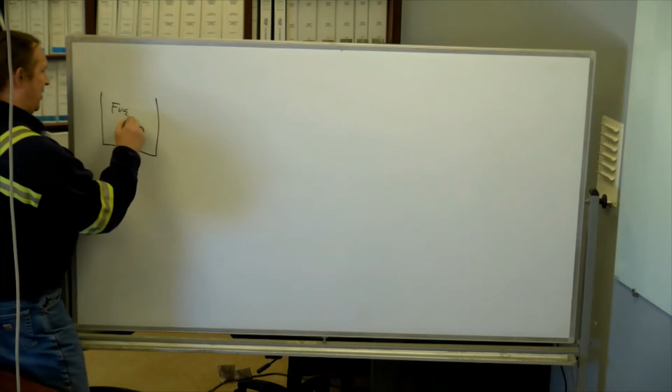So we start at the fuel oil tank. And then that goes over that levee we built to the fuel oil pumps. And these are positive displacement type pumps. Y'all know the difference between centrifugal pumps and positive displacement types? Anybody gonna help me out?

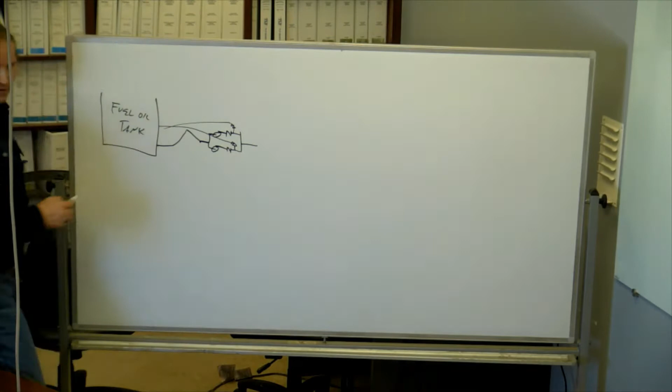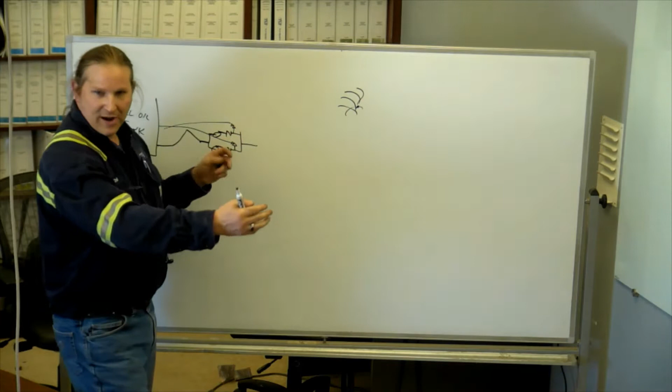No, okay. So in the centrifugal pump, what you've got is a disc that has vanes cut in it. And as the disc spins, the fluid gets slung outwards, and that slinging outwards creates pressure. So in this scenario, if the pump is deadheaded, there's a maximum pressure, and as you open up the valve and give the liquid somewhere to go, that pressure falls off.

A positive displacement pump is going to move a certain amount of fluid for every turn, right? So it's like a screw drive, like an auger, or it's like a piston pump, like a ketchup pump. It fills up the cylinder, and if it fills up 8 ounces, it's going to move 8 ounces of fluid. It doesn't matter what the pressure is.

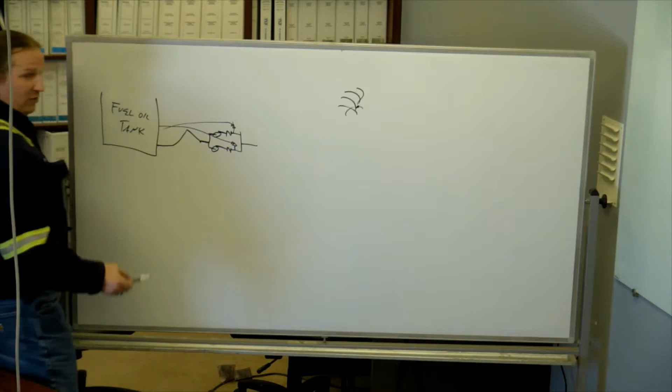Because it doesn't matter what the pressure is, that means if you shut off all the valves, that 8 ounces of fluid is still coming, and it's going to find a crack somewhere. So positive displacement pump systems don't really have recirc valves so much as they have relief valves. All right.

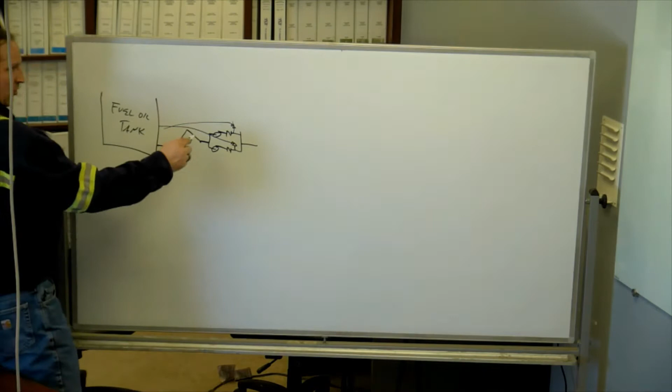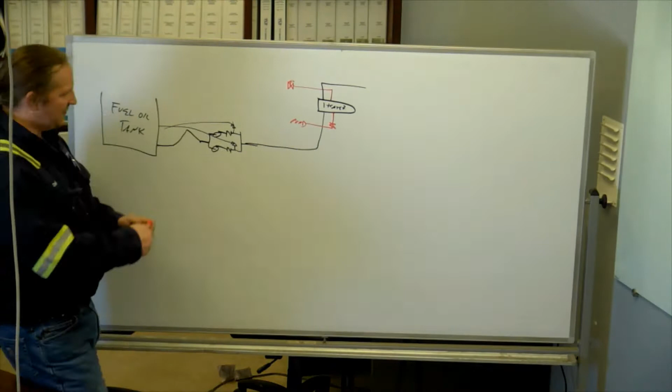So the fuel oil pumps, and then it goes underground across the street, and it goes up to the fuel oil heater on the second floor. Then immediately downstream of the heater, there is a pressure control valve. And this returns back to the tank.

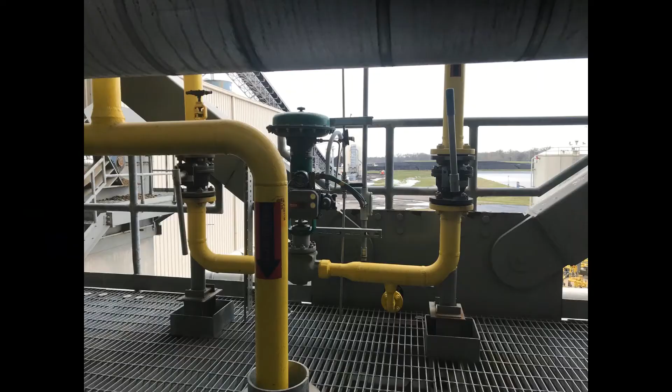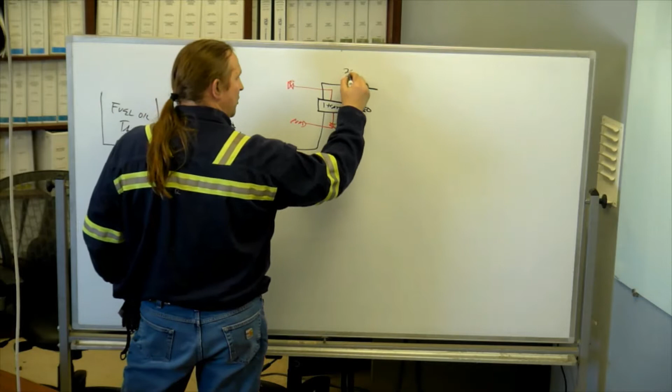This is physically behind the heater. It's between the heater and the rail. And that is maintaining 200 psi on that leg of the header. So as we use more oil and pressure drops, this valve pinches back to drive the pressure back up.

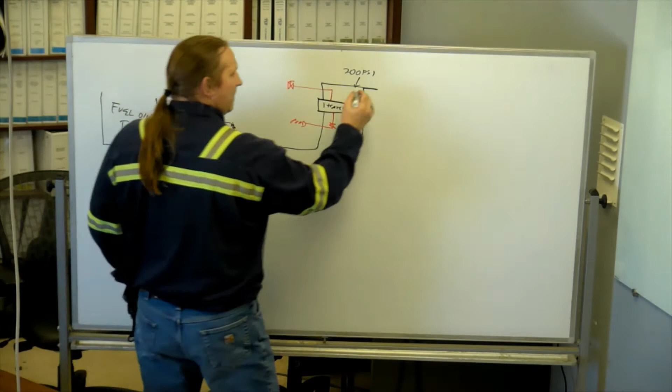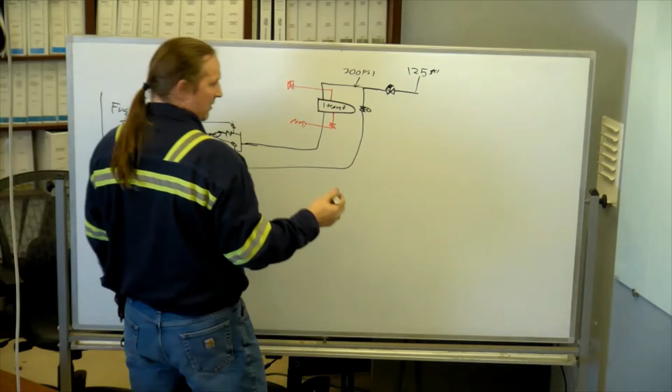And then when you go up a floor, we got another control valve, and this is maintaining 125 psi. And then you've got the trip valve. Then you got your accumulator, and then you got your trip valve.

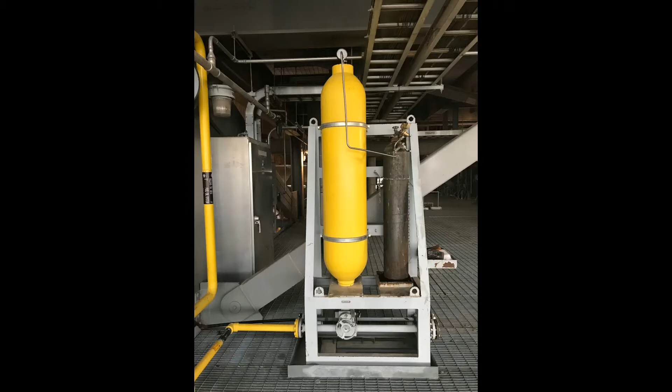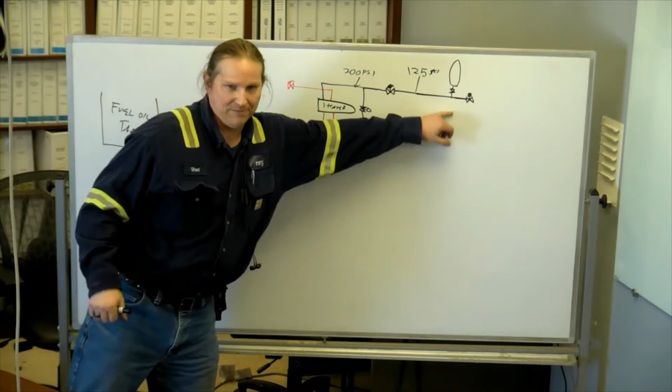Trip valve's in front of the accumulator, is it not? Physically, if you follow the pipe from the accumulator, it ties in upstream. I got busted on this 2 weeks ago, where I didn't know, and I ended up drawing the accumulator on the wrong side of the trip valve.

All right, what's the purpose of the accumulator? To maintain a pressure that you want for the valve. Maintain the pressure. Well, didn't I just say that the valves maintain the pressure? It's maintaining 125. It maintains your surges. All right, it reacts to surges to maintain the pressure.

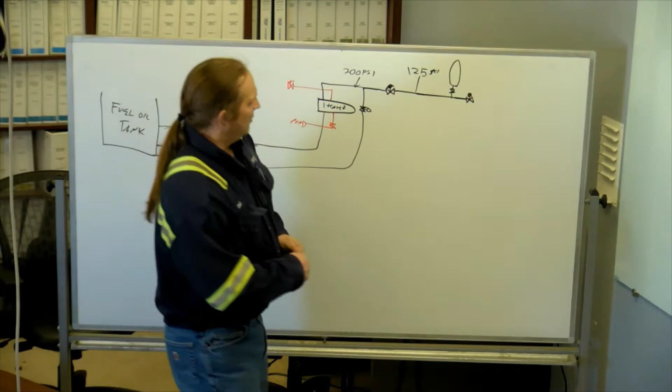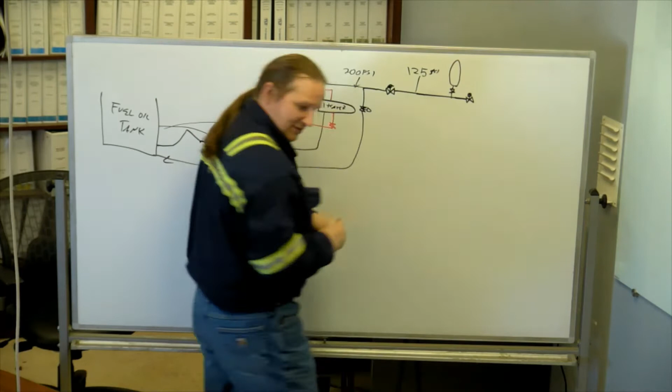So the accumulator has a volume of, what, 50 gallons to it, something like that? Inside that guy, there's a balloon. And that balloon, we line up a nitrogen bottle. Nitrogen should be a different color, shouldn't it? So we fill that balloon up with nitrogen, and we set it to whatever pressure we want. About 90 pounds. 90 pounds is a good answer.

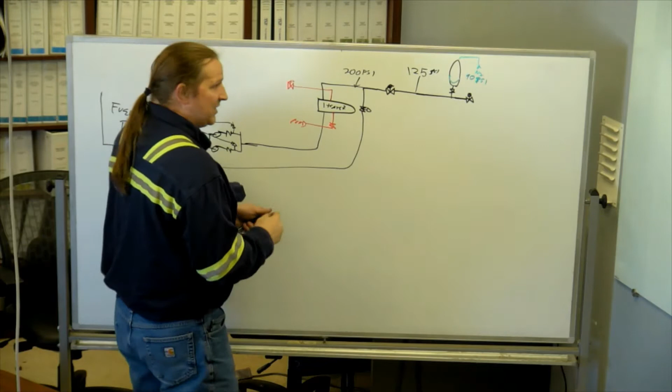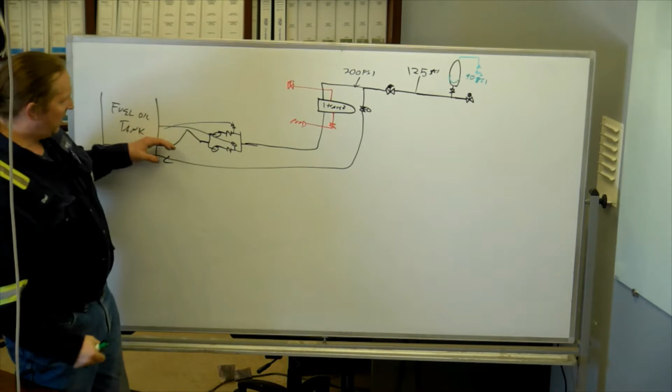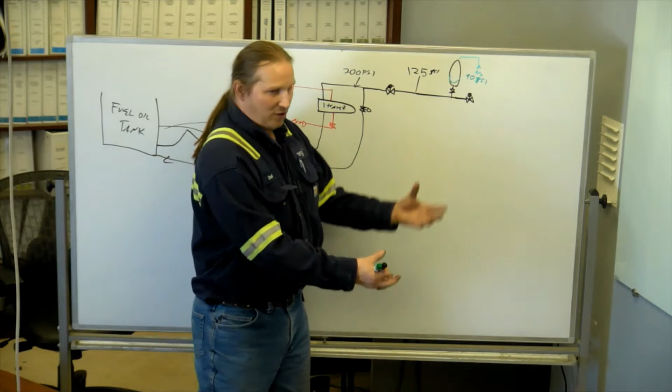You have to set this 90 pounds without any pressure on it. So ideally, you don't have the pump started yet when you get this pressure set. So then you start the pumps. This guy's going to be open all the way. This guy's going to slowly pinch back and drive that pressure up. This guy's going to get your 125, and as that pressure builds up to 125, that balloon is going to compress, and the oil is going to get pushed up into the accumulator.

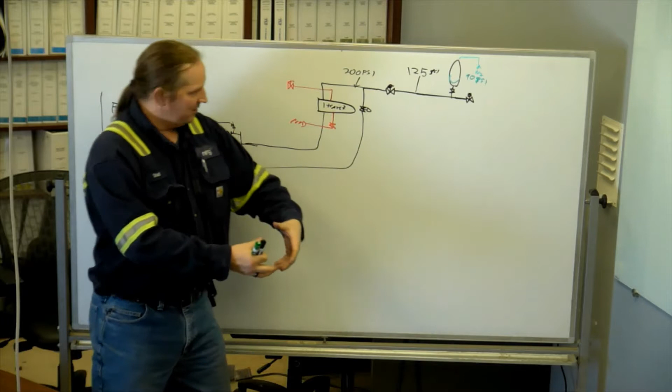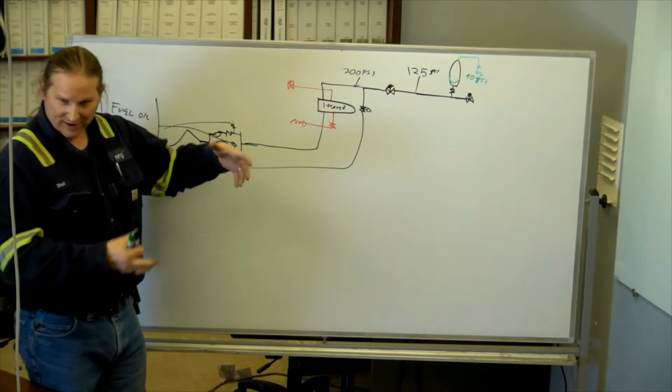So it's kind of like a water tower, where it's got some fluid stored up in it and some pressure. The water towers use height and gravity instead of using a balloon and nitrogen. So it gets shoved up in there, and so that volume of the accumulator is 2/3 oil. So you got 30 gallons of oil in there, and then you got your trip valve, and then we go out to the actual burner rows.

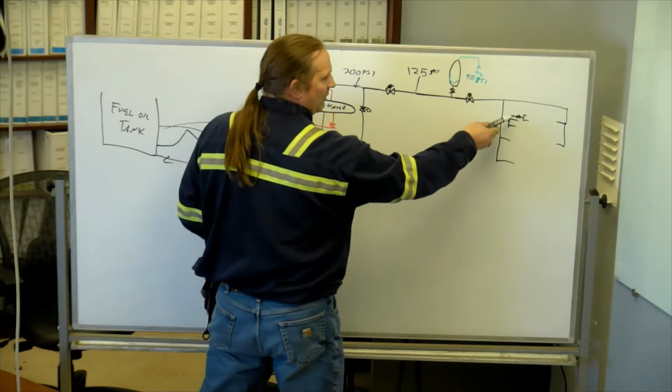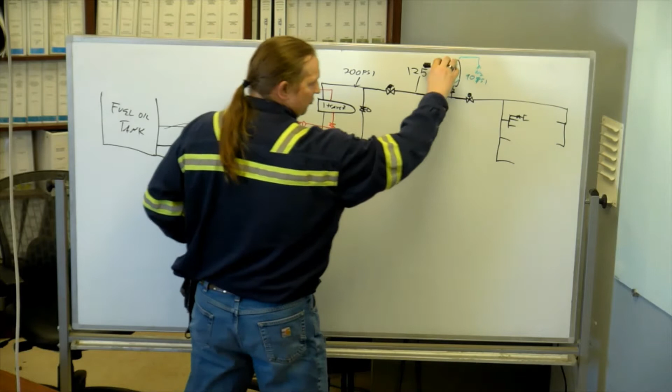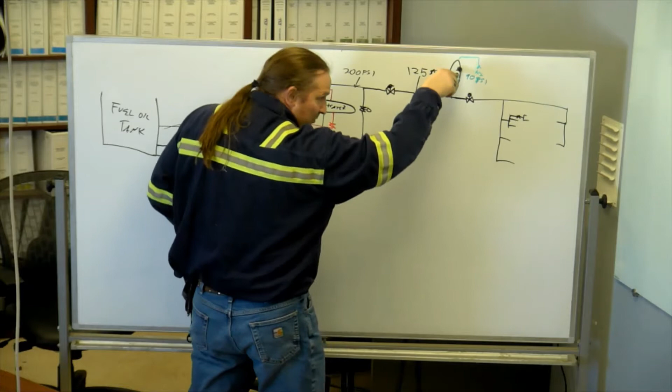So then that makes the pressure drop, and it takes a little while for this control valve to get back open and realize what's going on. But immediately, this nitrogen starts pushing that pressure back out and making up that 30 gallons to give this valve time to react.

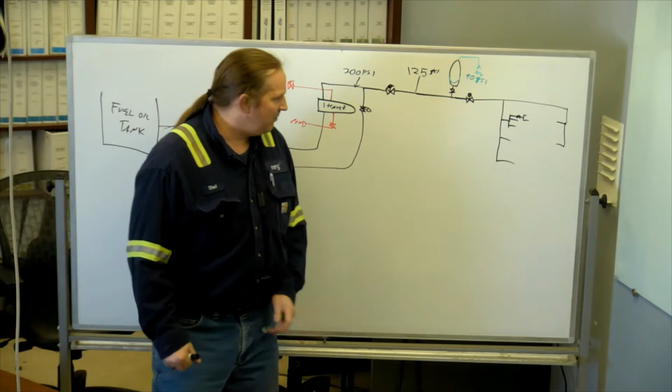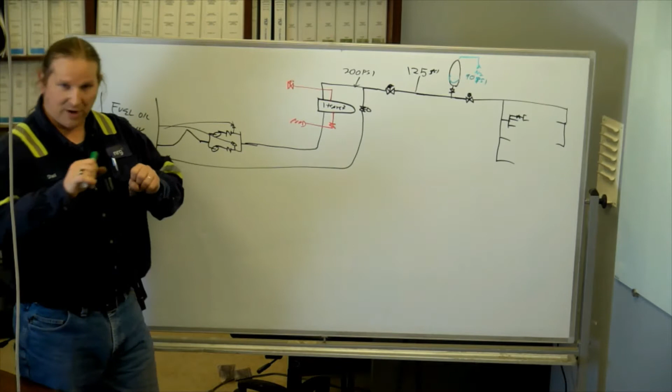If you don't have this accumulator lined up, then when you light off one pair, that pressure dips down, you don't have enough oil flow going to the igniter, and one of your igniters blows out. And so you end up putting one on and losing one, putting one on and losing one, and just chase them.

If you line this up with too much pressure, it is just as bad as not lining it up at all. If you have no pressure, then you end up with a solid slug of oil and nothing to push it out. If you have 130 pounds of nitrogen in there, then that balloon doesn't compress at all. You might as well just be pushing against a flange.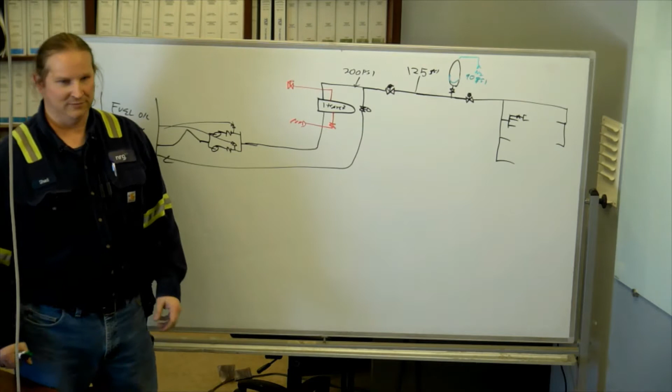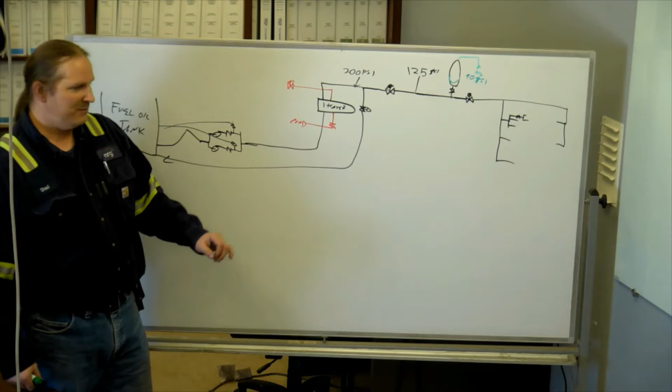There have been times that the balloon in the accumulator got leaks in it and got all filled up with oil on the inside. And the real answer there is to shut things down, drain it, and have maintenance replace the bladder. I think a lot of that was self-inflicted because operators were not lining up the balloon before the pressure started, and the balloon was getting all wadded up in there.

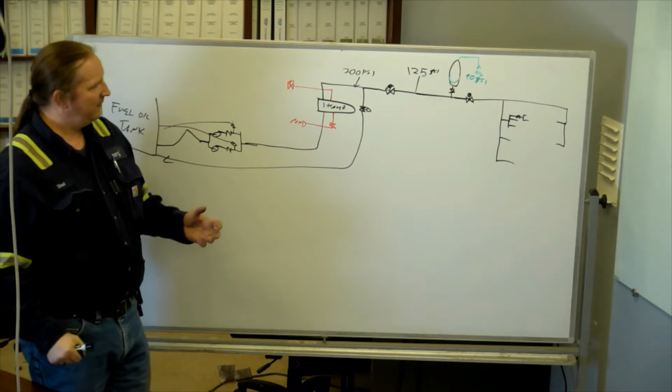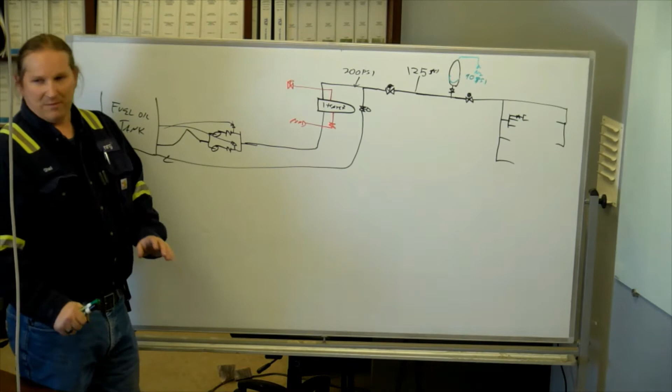And a lot of it was just putting too much pressure or not enough pressure and then not getting the right performance and then blaming it on the balloon when there was nothing physically wrong with it at all anyway. But we've learned. We're better. It's continuous improvement, right?

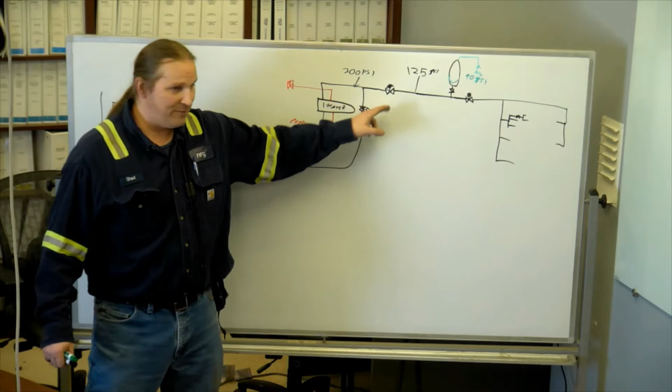But if this isn't working and you have a control room operator that doesn't want to shut down everything and bring maintenance in to fix it, then maybe when they're lighting off igniters, they're gonna try and time it. So right before the igniters, they take this valve to manual, they put an extra 10% in there, and then put it back in auto. So that you're leading the pressure loss to stay ahead of it.

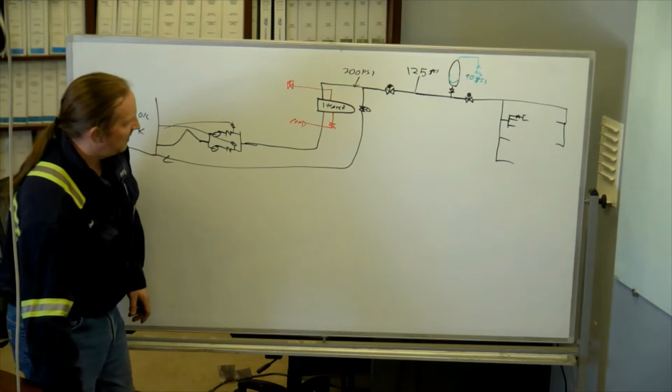All right, so if there's a mill in service and you're lighting off igniters, then there's supposed to be fire in there from the mill. The flame scanners are going to see fire, and the logic says, oh, that's fine, we're supposed to see fire. If there's not a mill in service and you're lighting off the igniters, then it's supposed to not see any fire.

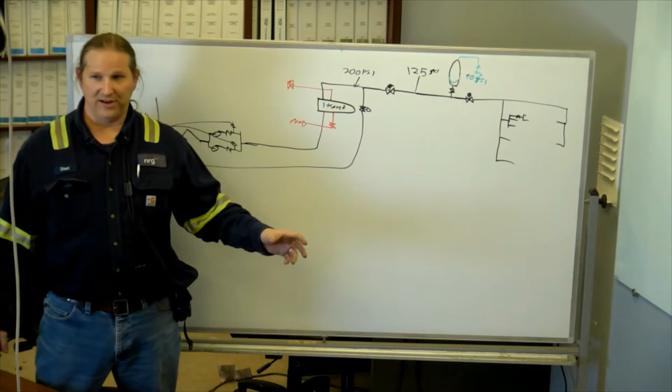And the flame scanners are kind of too sensitive and are kind of bad about seeing the fire on the other side or getting lit off by the adjacent fire. They're not focused as narrowly as the engineers that designed the plant thought they would be. So we have to trick fuck these things all the time. The trick fuck comes in two methods. The easier method is unplug it.

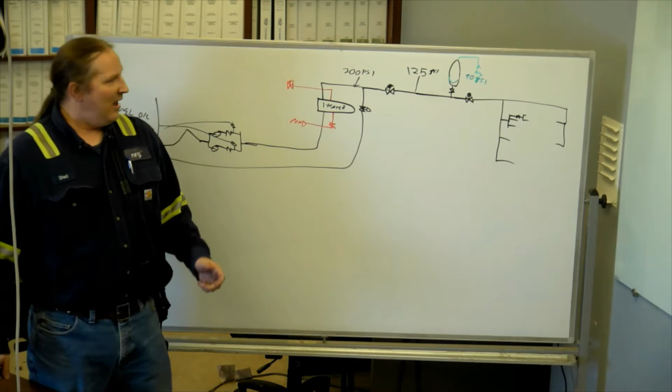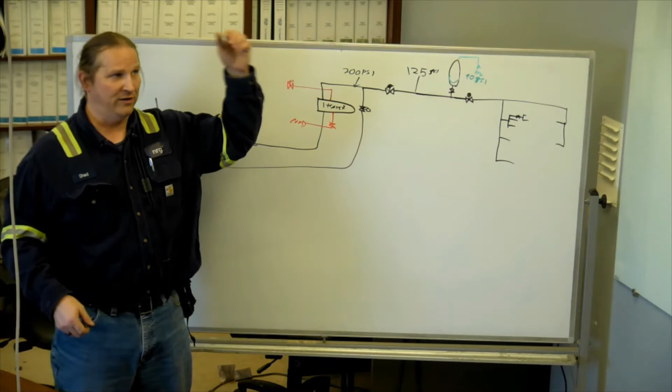Thank you very much, Al.

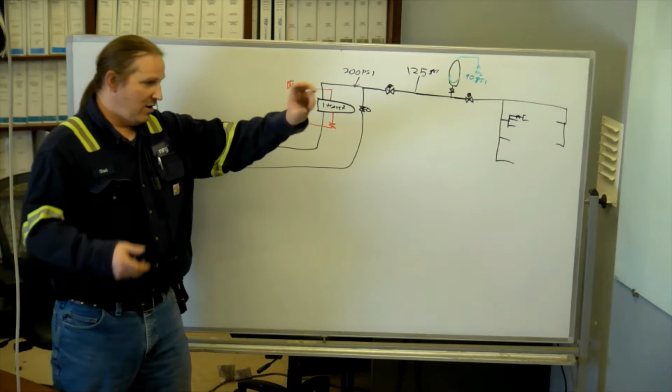If the igniter and the main flame are both bad quality, then it goes, oh, whoa, I can't light off. I don't know what that flame is. I'm not going to blow up this thing. So you have to unplug one and then unscrew the other. And it can end up where you've got none of your flame scanners actually reading during that minute and a half of light off.

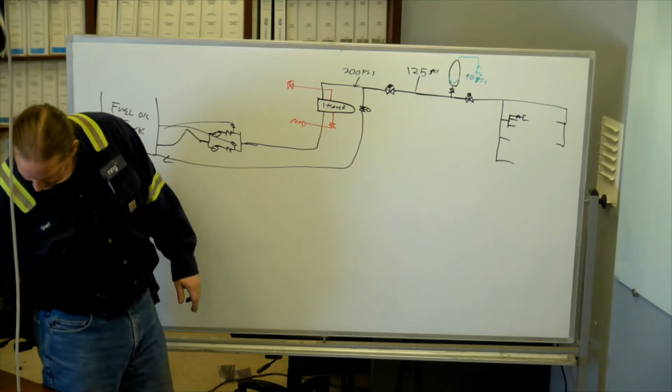It also has to legitimately see flame within a certain amount of time, or that'll screw up the sequence and it'll shut down. So then, once the valves come open, what other valves are there? There's also air going to this thing, right? Yeah. What color's air? I guess air's pink today. So you've got an air valve, and that air goes out to the tip, and the oil. So it's atomizing air. What does atomizing mean?

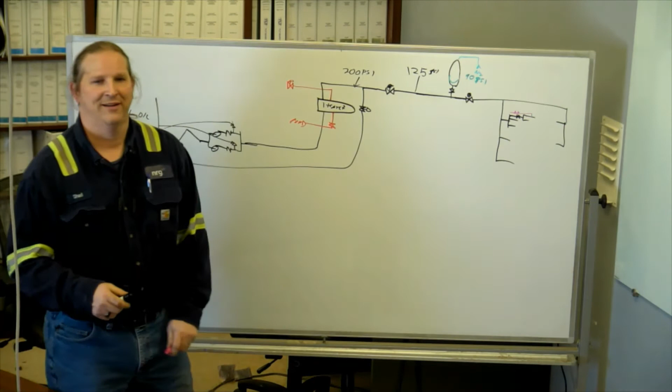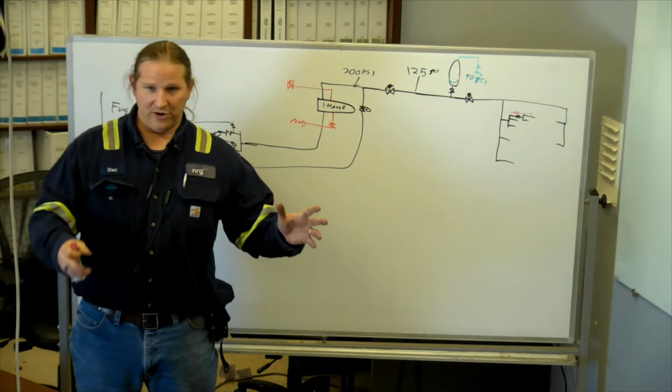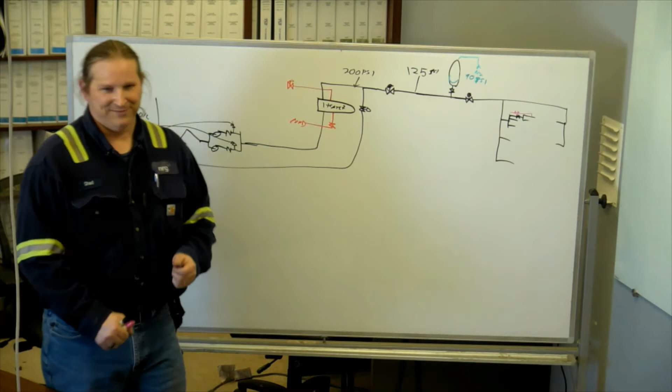Break into droplets. Perfect. So the idea is it's hard to light off oil. You can put out a match in diesel fuel. This is not something that most people have the nerve to do, but it can be done. But if you mist it, you increase that surface area, you increase the amount of oxygen getting to each bit, and it lights off easier. It's vapors that really light off. Also, if the diesel fuel's at 100 degrees, then it might light off with just a match. Please, kids, be careful. Don't do anything I say.

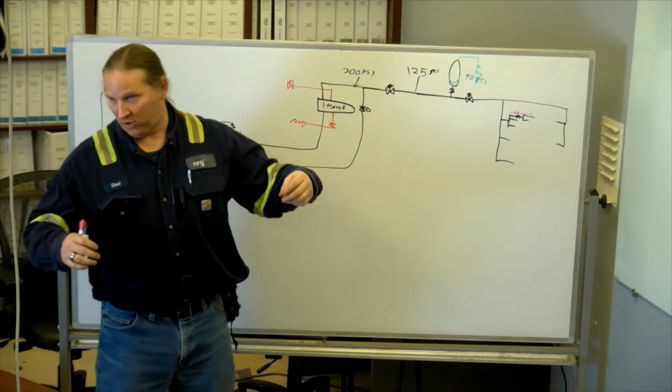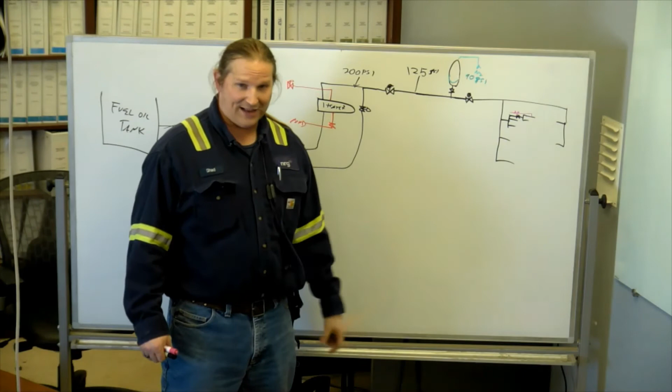All right. So the purpose of the atomizing air is it joins the oil at the tip of the fuel thing, and then that gives you a good spray, and that makes it easier for it to light off. And then you also have a spark rod that is using electricity and a gap and making a white light that you can see through your little glass, and that's the spark that lights it off.

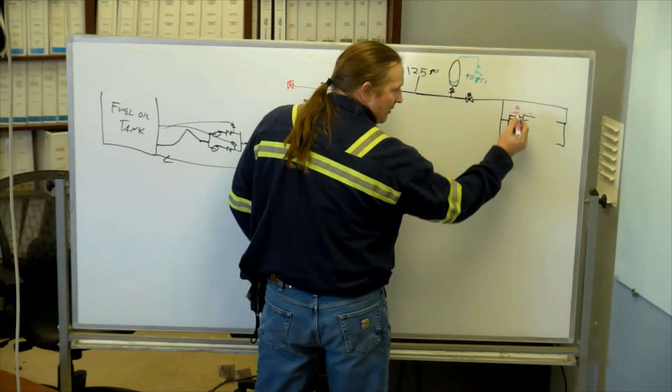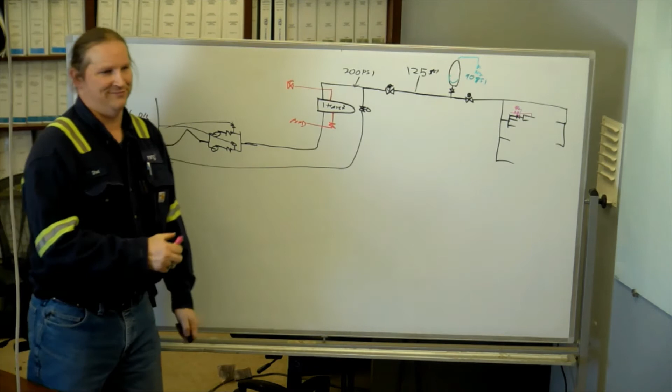And then there is another air valve right there, and that is a purge line. In the event that it doesn't light off, that your sequence doesn't work, then this guy comes open and it ties in right next to your fuel oil valve so that you don't have 5 gallons of oil sitting in that pipe. It all gets pushed out. And lots of times when that happens, it looks like it lights off really good for a second. All right.

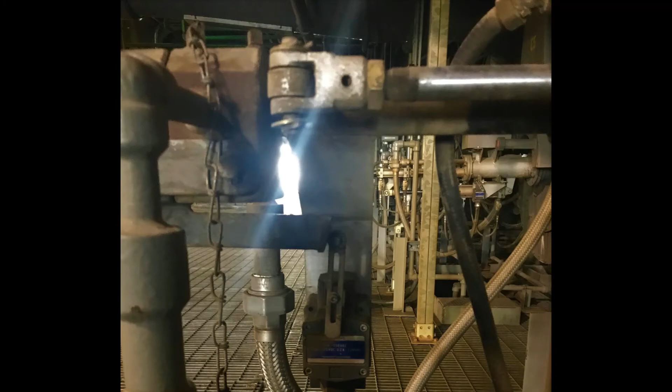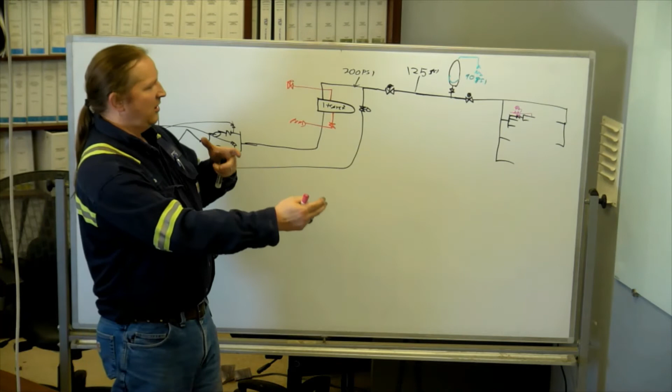What else we got? There's limit switches on the atomizer, or on the igniter tip itself. There's one that tells it that the back's screwed on. So when you unscrew the back and clean the tip, if you don't get it jacked all the way in there like it's supposed to, it won't make that limit switch and it won't let them start it. And then there's another limit switch, and there's 2 little pistons. So there's a piston that moves in a little bit right at the beginning, and then there's a larger piston that moves in the rest of the way at the end.

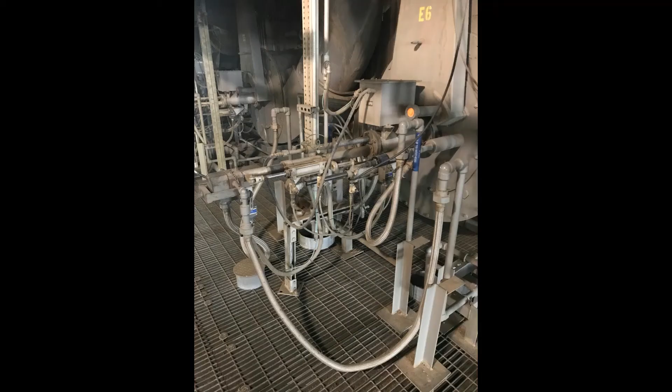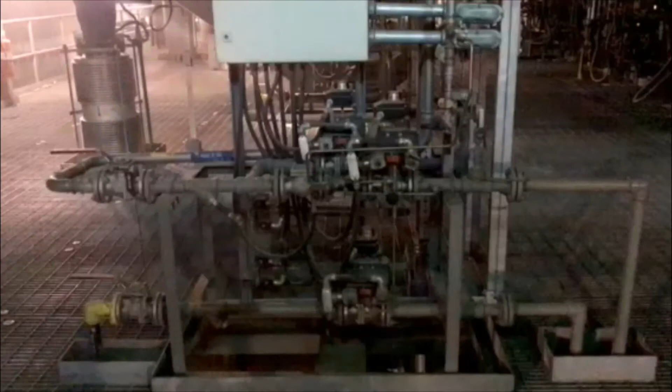And there's a limit switch associated with that last piston, and that has to make. These valves all have limit switches, so the DCS has to know that they actually made their limit. The valves actually have to make their limit in a certain amount of time. Sometimes they're really slow. Most of the time when they're really slow, there is an exhaust vent, and that thing will get dusted up or liquided up.

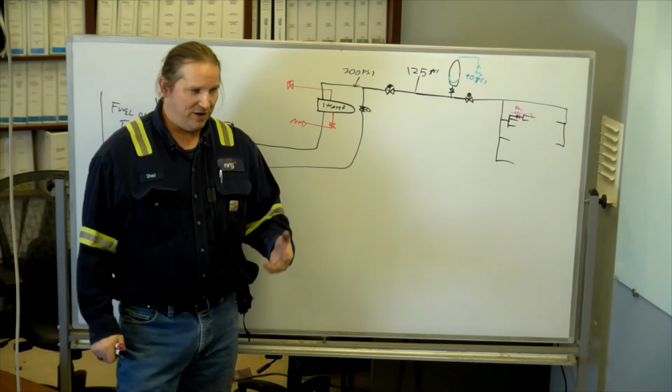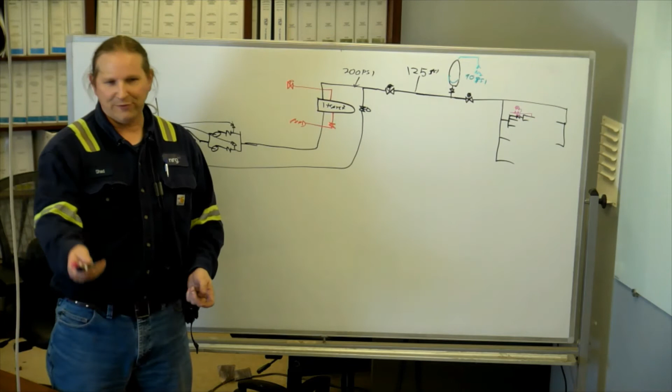The new dryers have been doing a better job, and these haven't been the kind of problem they used to be. And also, I think guys have been just fucking throwing away the filters. But the mufflers, you could take them off, and after you take one off, don't throw it away. They're free. Oh, they're not free. Somebody's paying for them. But they're down in the shop. We have them. You don't need a special key to get to them or anything. You can just get one that's the right size, screw it on, and replace it.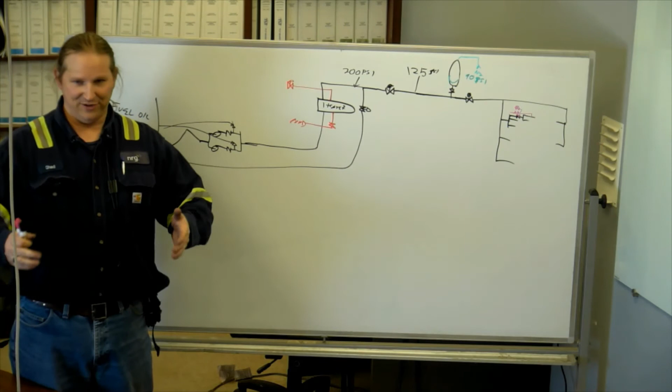I'll also say that the cut dampers that we struggle against, this is the problem with some of the cut dampers, is the discharge vents getting clogged, not that there's anything physically jammed up with it. All right.

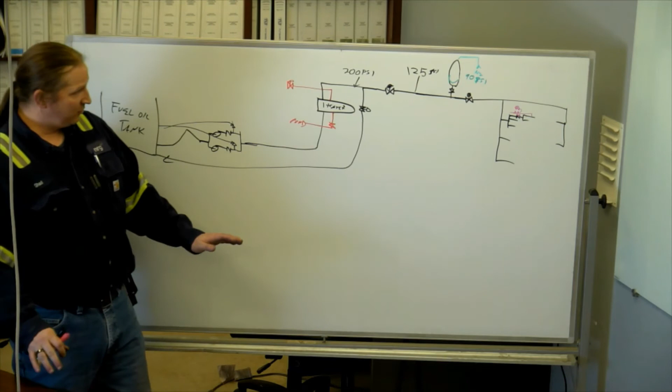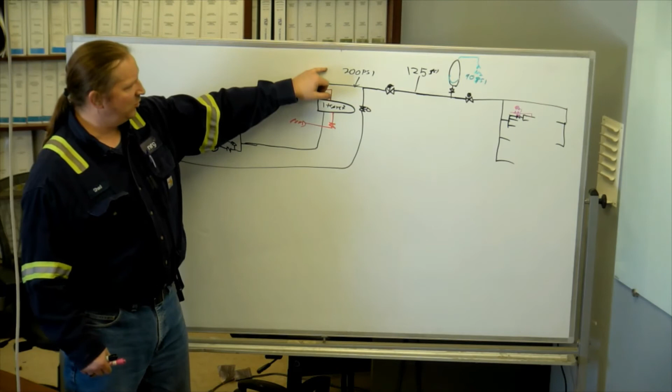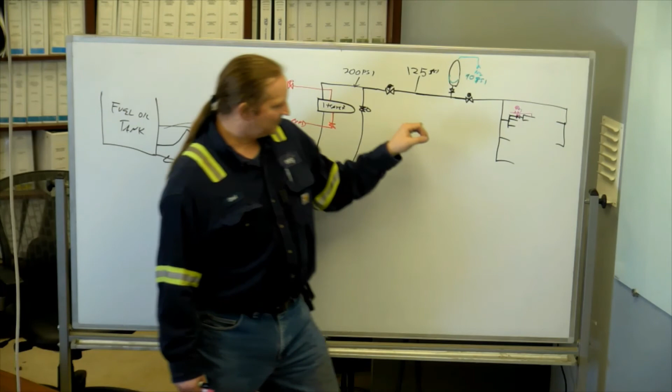So running through that real quick one last time. So we don't have anything running. We charge the accumulator with 90 pounds. We start a fuel oil pump. The recirc line, the pressure control line, it starts out wide open and it slowly chokes back and builds up to 200 pounds. Then this guy is maintaining 125 pounds downstream. So it stays open until it gets up to 125, then starts pinching off and tries to maintain that as that goes above it. Then we have this trip valve. I mentioned it, but I didn't say what it's for.

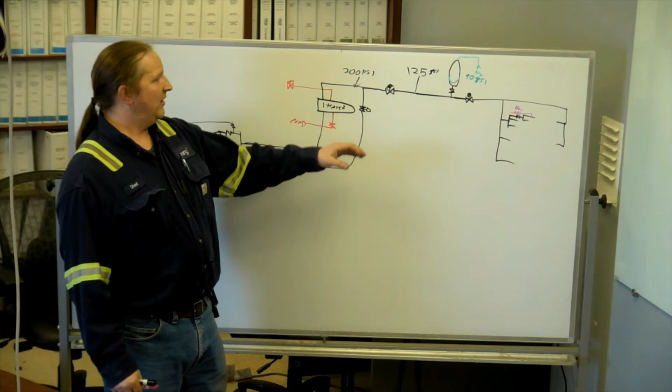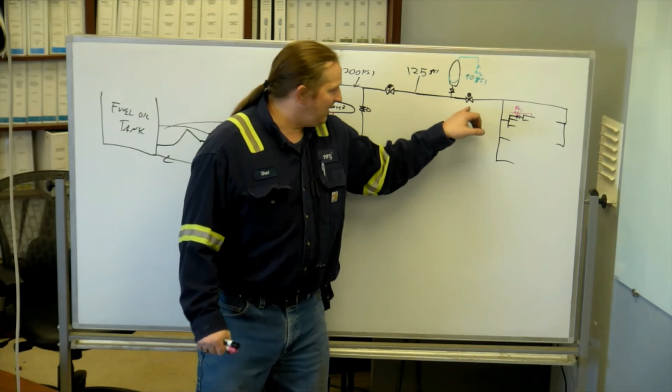To make sure that we're holding, there is a 2-minute leak check that happens. So there is a 10-minute purge that a good CRO will time so that you guys aren't especially aware of it. And then there's a 2-minute leak check. So this guy opens, we measure the pressure, he shuts, we wait 2 minutes and we make sure that pressure doesn't fall, and that tells us that all 15 of our oil valves are holding.

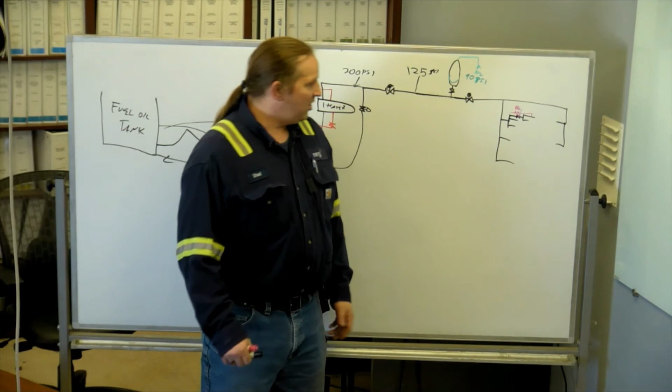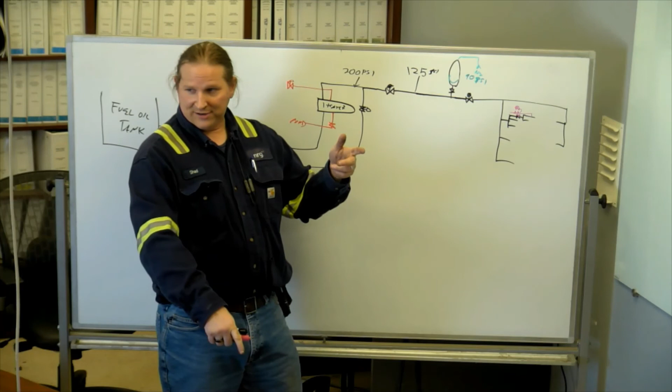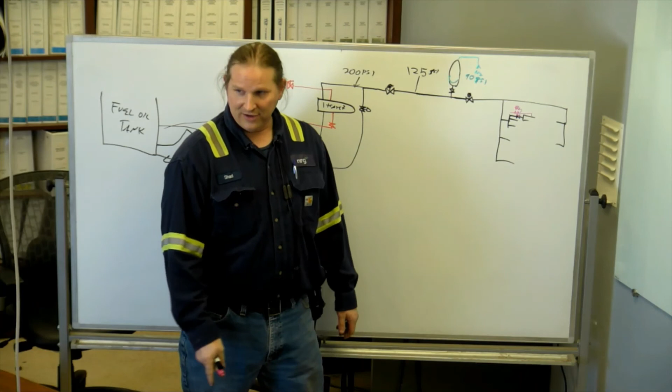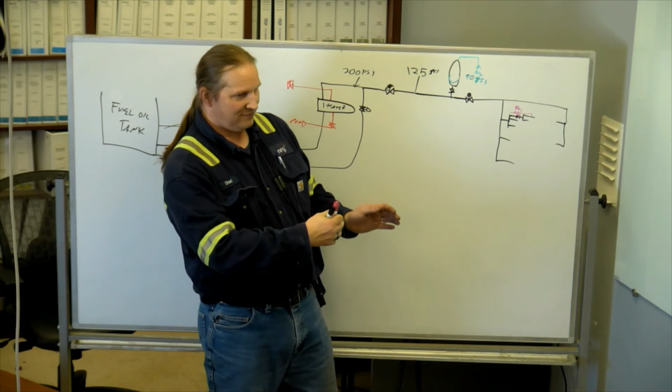And then you get your spark rod, and then poof, and you get your fire in there, and then cha-chung, you move in that last bit, and that's it. Now you got a pair in.

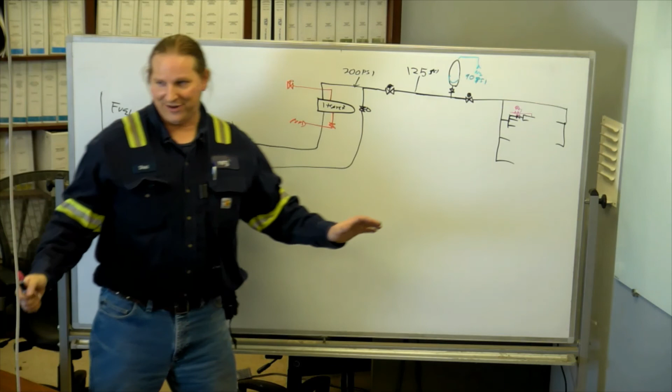Man, this one's full of sound effects.